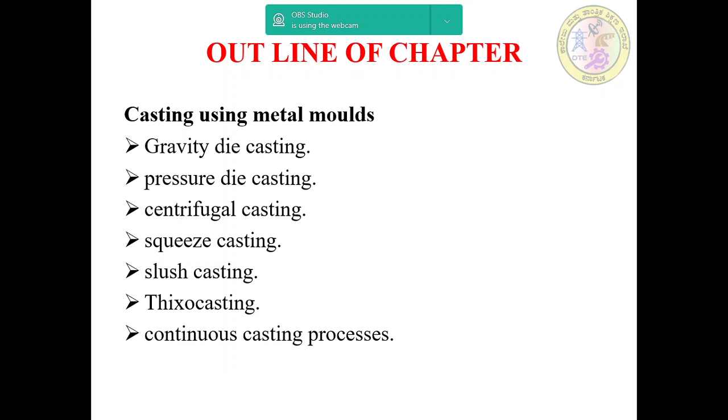In previous sessions, we already discussed casting using metal molds, melting furnaces and their classification, gas fired pit furnace, resistance furnace, and different coreless induction furnaces. In today's session we will discuss electric arc furnace, and the constructional features and working principle of the cupola furnace.

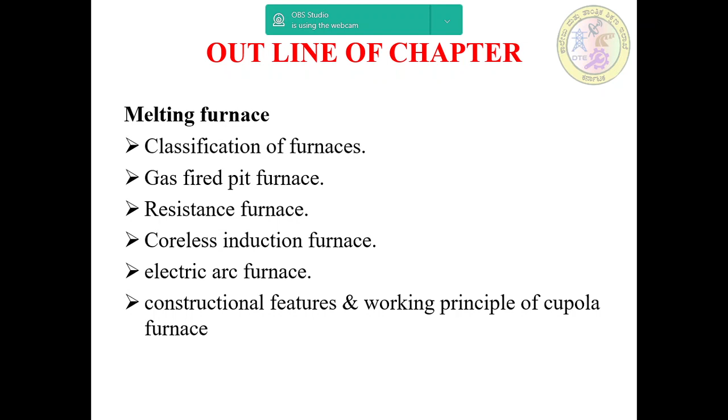Next we will take electric arc furnace. It is a versatile furnace used to melt mainly steel. It makes use of electric current to generate the arc in the metal. The arc heats and melts the charge.

Melting using electricity as a source of energy is more common. This is because electric furnace provides more flexibility and cleanliness in operation, and these are suitable for production of high quality steels. There are two types of electric arc furnaces: direct arc furnaces and indirect arc furnaces. We'll discuss one by one.

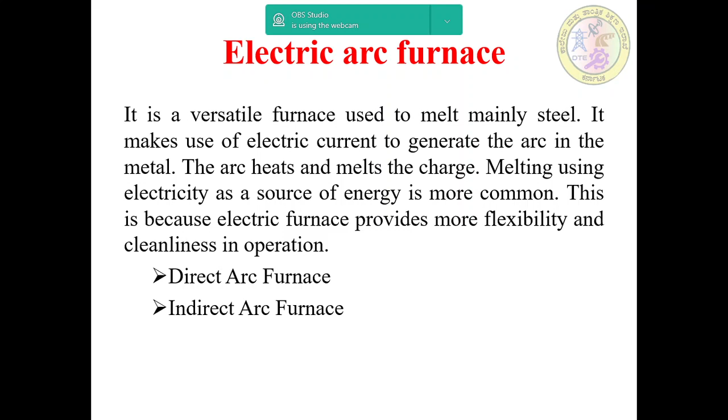First we'll take direct arc furnace. Here the figure shows the direct arc electric furnace. It consists of a steel shell, usually in the form of cylindrical shape.

This is the outermost layer. It contains a steel shell, usually cylindrical in shape with a spherical or flat base, which is mounted on rollers to enable tilting the furnace to tap the molten metal.

On either side you can tilt: this side you can take the slag door, and the other one you take the molten metal or pouring spout. The shell is lined with fire bricks, also called magnesite brick. The roof is made of silica bricks, and the hearth is lined with basic material such as magnesite brick.

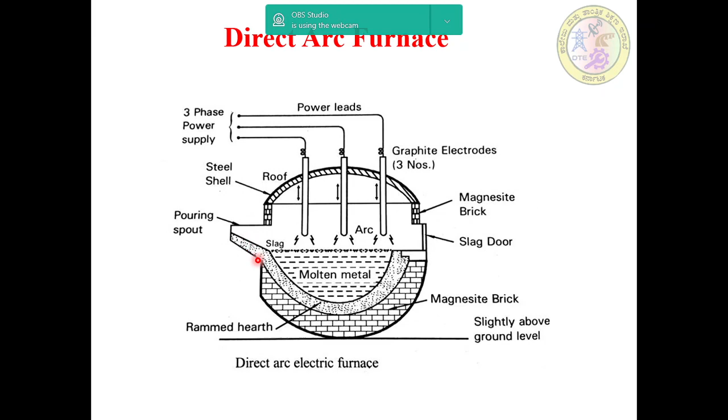This is about direct arc furnace. Next we'll go for indirect arc furnace. This figure shows the indirect arc furnace used for melting small quantities of ferrous and non-ferrous metals. The furnace consists of a cylindrical or barrel shaped shell.

It is lined with a refractory lining material. The shell is mounted on rollers on two sides and can be tilted through 180 degree. This facilitates easy pouring of the molten metal, and also the rollers provide rocking action to the furnace that speeds the melting rate.

Two carbon electrodes are mounted along the horizontal axis and can be automatically adjusted for maintaining the proper arc column. You have to maintain the proper distance for the arc column. A charging door and pouring spout serve their purpose. This is about the construction of this indirect arc furnace, and then the working principle.

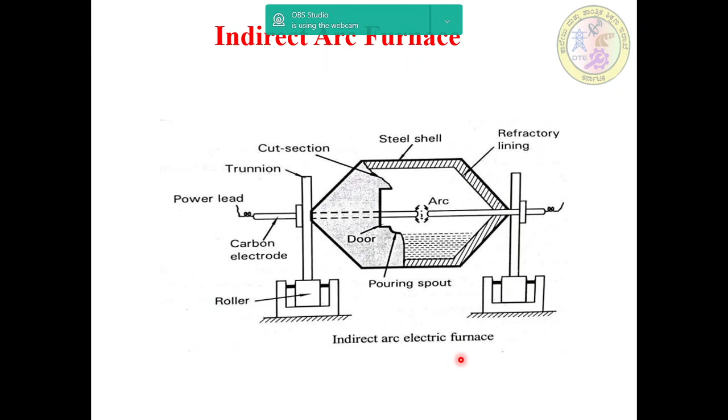Next we'll go for cupola furnace. In this cupola furnace, cupola is a vertical cylindrical shape type furnace. It works on countercurrent principle. Charged materials will be descending downwards, flue gases will be ascending upwards. Thereby, exchange of heat between the rising gases and the descending charge takes place efficiently.

Coke lumps are used as a fuel, and then limestone is used as a flux material. Coke, limestone and metal charge are charged into the cupola in the same sequence with a definite ratio.

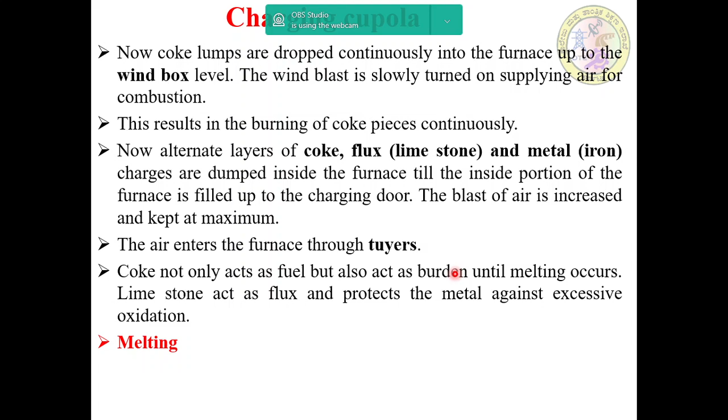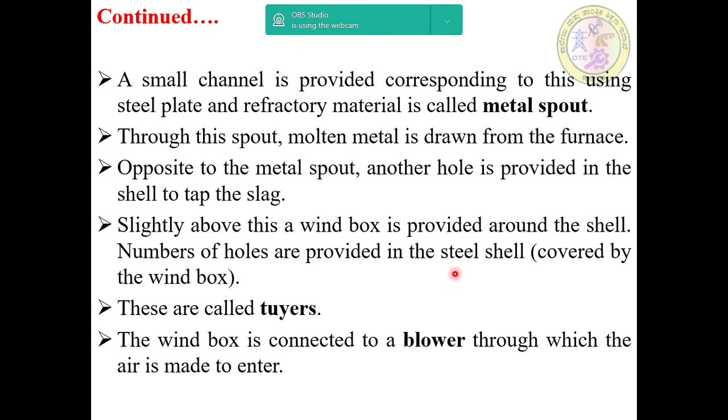Here the molten metal is heated above its melting point, hence referred to as superheat. Above this zone the actual melting of metal takes place. This zone is called the melting zone, and this zone is approximately 2 times that of the superheat zone.

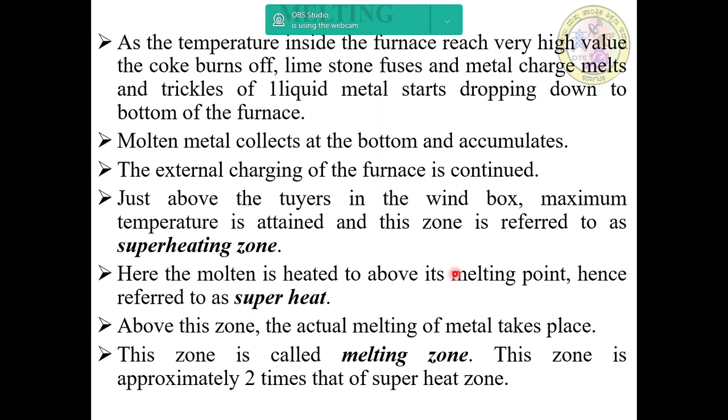Above this zone and up to the charging door is the preheating zone. Here metal charge, lime and coke will be preheated.

Above the door and up to the hood region is the stack zone. Only flue gases escape through this zone. As the cold charges move downwards, the hot flue gases ascend. This results in a very good heat exchange between the two, the charges gain heat and the flue gases lose heat.

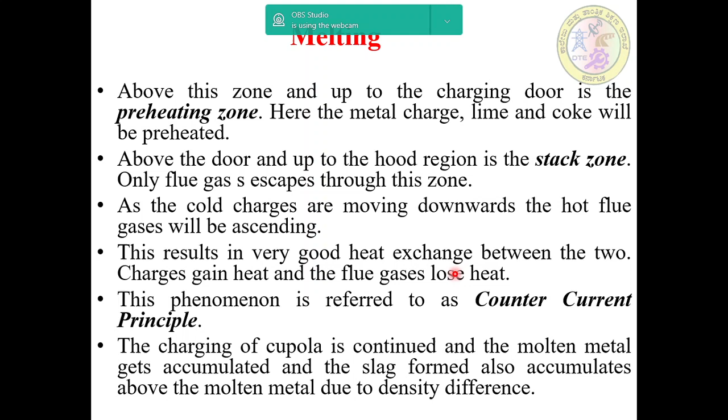This phenomenon is referred to as the counter current principle. As charging continues, molten metal accumulates, and the slag formed also accumulates above the molten metal due to their density difference. Next is tapping of slag and molten metal.

The slag door is kept open always, and when the slag level inside the furnace reaches the slag spout, slag starts coming out continuously. This is an indication that the molten metal is ready for tapping. This should happen around 15 minutes after full blast of air to the furnace. The bottle green color of the slag also suggests that the molten metal quality is good.

Now the metal spout is opened and the molten metal is tapped into the ladle and collected. The furnace operation is continued and the molten metal is continuously tapped. The furnace is stopped by stopping charging.

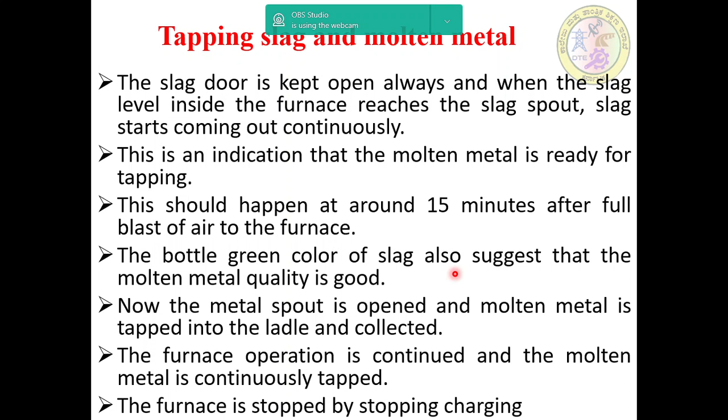The last step is dropping down the bottom. After tapping the molten metal completely from the furnace, the bottom doors are dropped down. The slag drops out of the furnace. After cooling, the necessary patchwork of lining is done before the next melting operation.

The ratio of coke to metal is referred to as the coke to metal ratio. For good coke, it should be anywhere between 1:8 to 1:10 by weight. The percentage of limestone is around 5 to 7% of the metal charge.

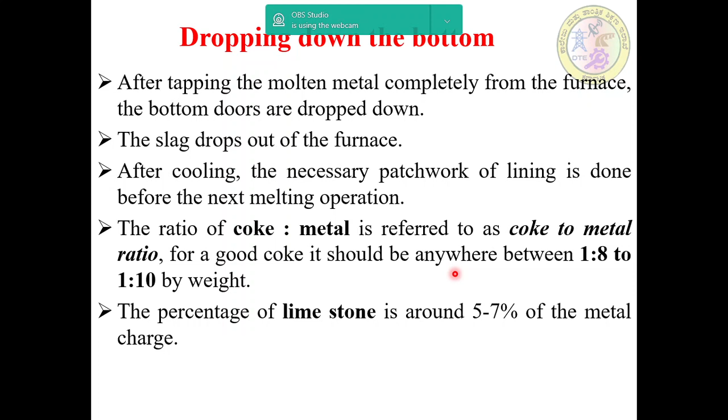The inside lined diameter of the cupola determines the melting capacity of the cupola. It may vary from approximately 68 to 275 centimeters. The cupola is specified by the quantity of molten metal that can be melted per hour. For example, 10 tons per hour means 10 tons of cast iron is melted in 1 hour.

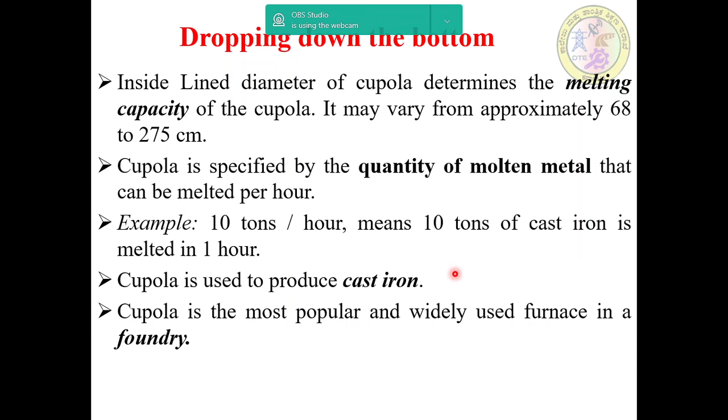Cupola is used to produce cast iron, and cupola is the most popular and widely used furnace in a foundry. This is about the working of this cupola furnace, and then we'll go for zones in cupola.

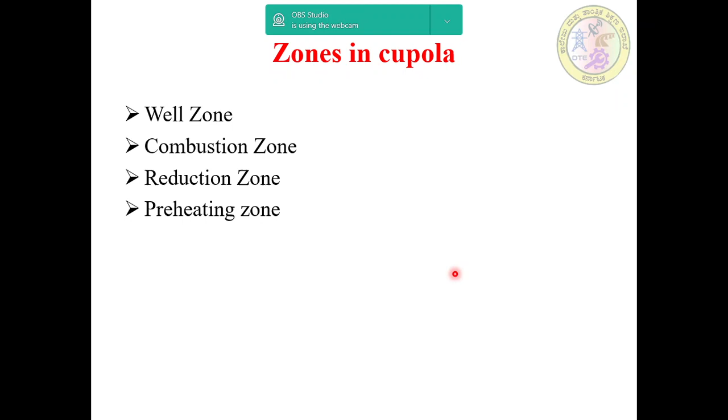In zones in cupola, there are 4 main zones: well zone, combustion zone, reduction zone, and preheating zone. We'll explain one by one. Before that, the height of the furnace can be divided into these 4 various zones for study purposes, to observe how the melting process takes place.

In the combustion zone or oxidation zone, situated from the bottom edge of the tuyeres, rapid combustion takes place, due to which a lot of heat is generated in the furnace. The temperature in this zone varies from 1550 to 1850 degrees centigrade. Here carbon combines with oxygen to give carbon dioxide - this is an exothermic reaction, and a lot of heat is generated.